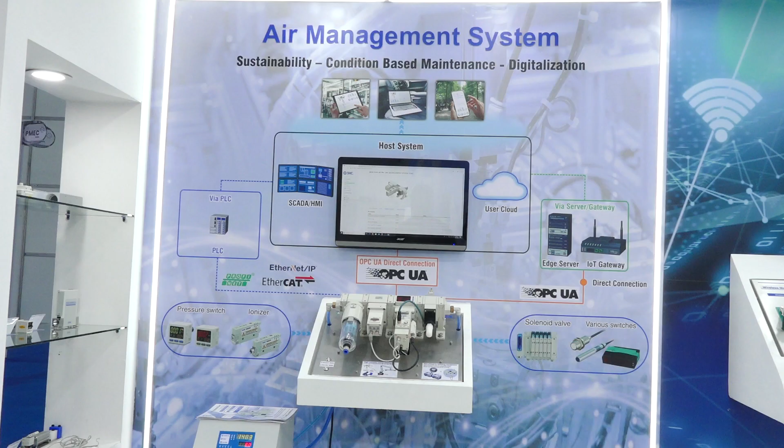So here we will be explaining the SMC air management system.

If you see in this panel, starting from the left side, first we have the mist separator. Whatever impurities are coming in the air, this ensures they do not reach the further components, which helps us maintain the life of those components.

Next, we come to the electro-pneumatic regulator. The function of this regulator is to maintain the pressure in the machine.

Next is the flow sensor. This sensor provides options for flow, pressure, air temperature, as well as accumulated flow.

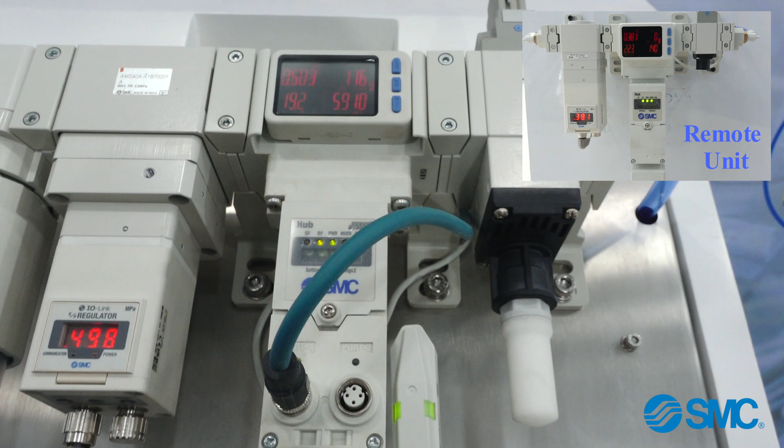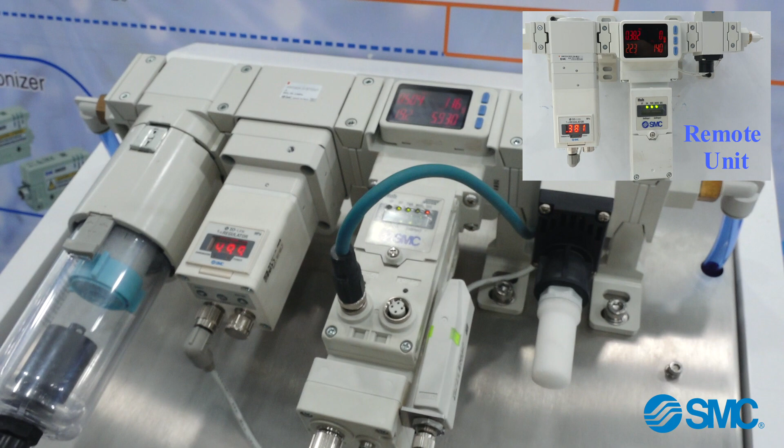Then below is our hub unit, which is utilized to provide us data and can communicate with further devices to capture their data. So our air management system communicates wirelessly to this remote unit and gets all that data through wireless communication, providing me data through that single unit. One AMS base unit can communicate with 10 more remote units. So this is the wireless remote which can communicate with the AMS air management system.

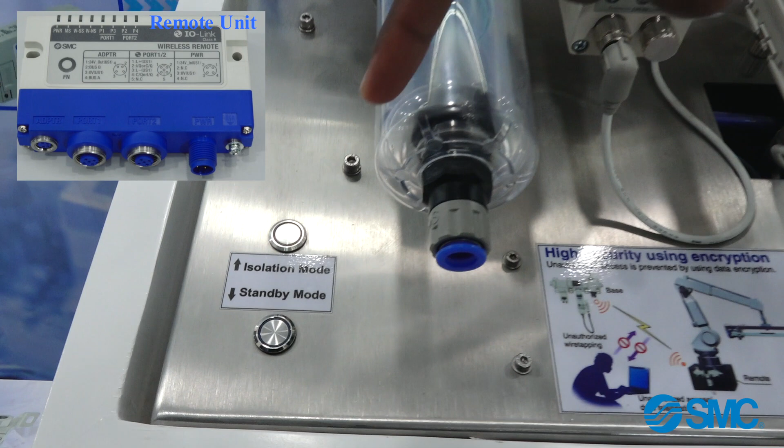It has two ports, port 1 and port 2. You can connect any IO-Link sensor with this, and you have to provide power to this remote unit, which will be connected to a wireless antenna. Through that you can get the data in your air management system through wireless communication up to 100 meters of working radius.

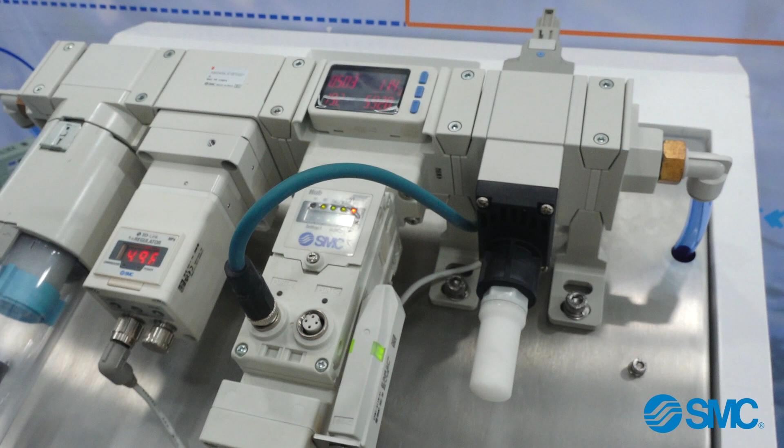Next, we come to the soft start valve. This soft start valve has a function where whenever your machine's first cycle starts, it makes that cycle run at a lower pressure, so whoever is working on the machine will not get hit by the full pressure.

Also, this valve is utilized for the isolation purpose. Whenever your machine is not consuming any compressed air and you want to isolate the air from the system, the machine will go to the isolation stage.

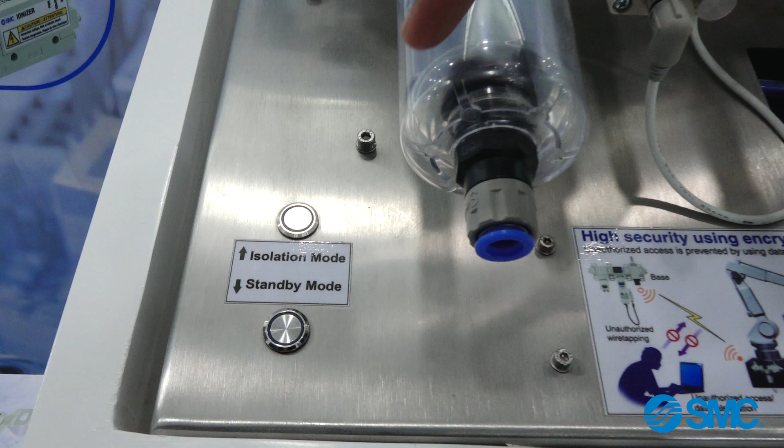Also, when you see here in the panel, there are two buttons: one is the isolation button and the next is the standby button. Once I press the standby button, the device is programmed so that whenever your machine's air consumption is less than 120 liters, the machine will go to standby mode.

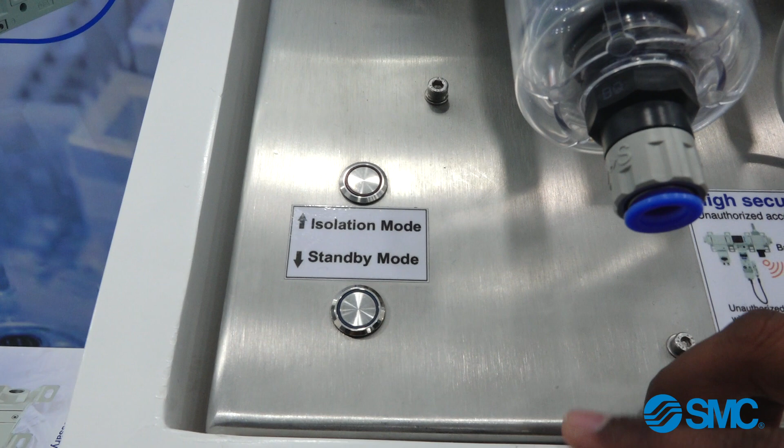So if we see in the system, the present consumption of the machine is 118 liters or 116 liters. Whenever my machine gets confirmation data from the PLC or through any external input signal, it will change the system from working condition to standby condition.

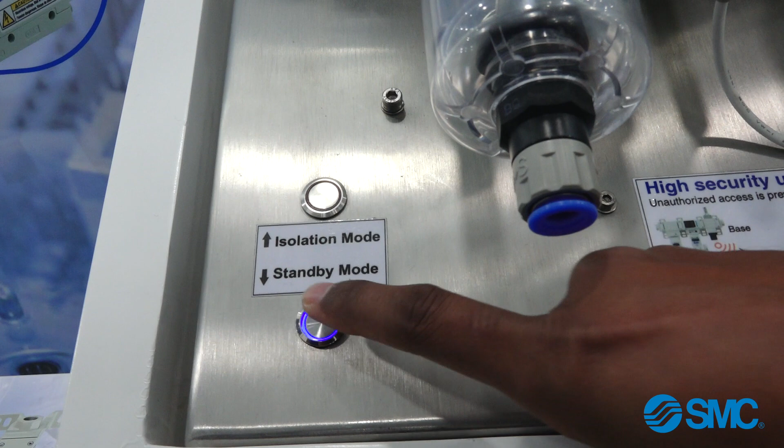So now I am providing the signal to the component through standby mode. Once I press the standby switch signal, my machine's standby pressure changes from 5 bar to 4 bar. So during the standby condition, my machine's pressure requirement is reduced, which has reduced my machine's air consumption from 118 liters to 88-90 liters, saving air during the standby condition.

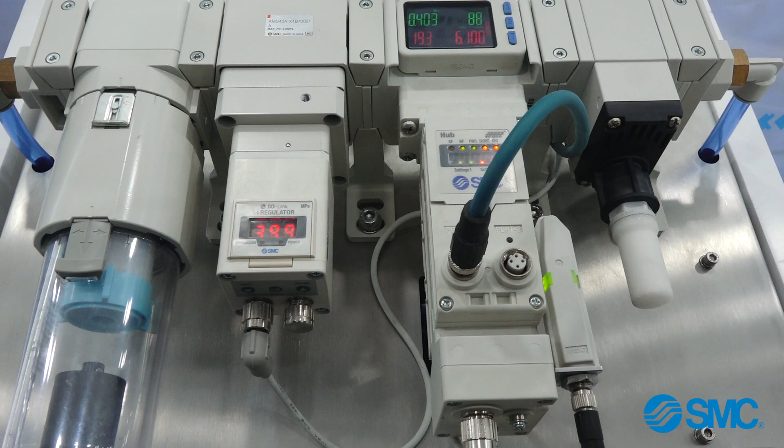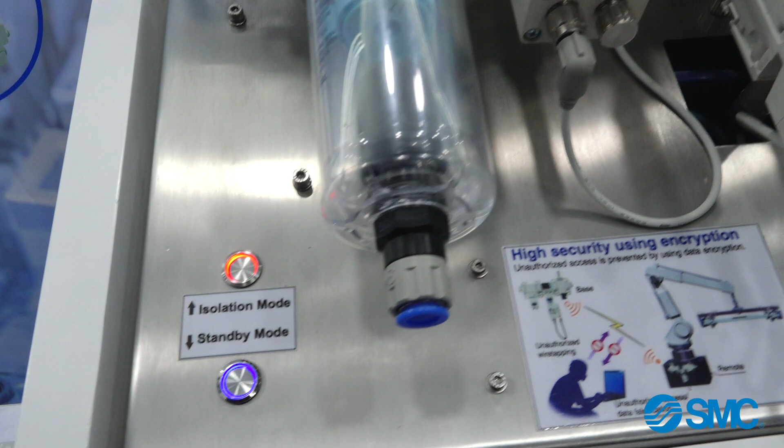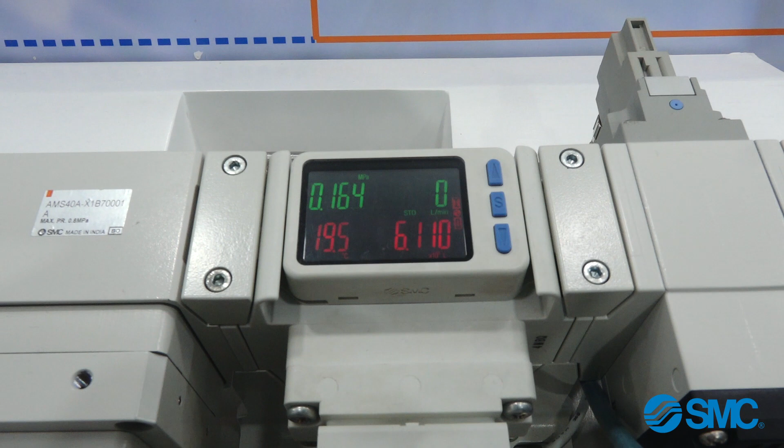Next function: when your machine is not working for a particular interval of time, you can provide the next signal. For example, you have given the machine an isolation signal. Once the isolation signal reaches, your machine consumption will drop down from 88 liters to 0 liters. So this is how your machine can smartly save your air consumption during non-working or standby conditions.

So now we will explain the web server function of the air management system. When I click the web server IP address which has been set in the device, it takes me to the home page. From the home page, I can see that two components are connected.

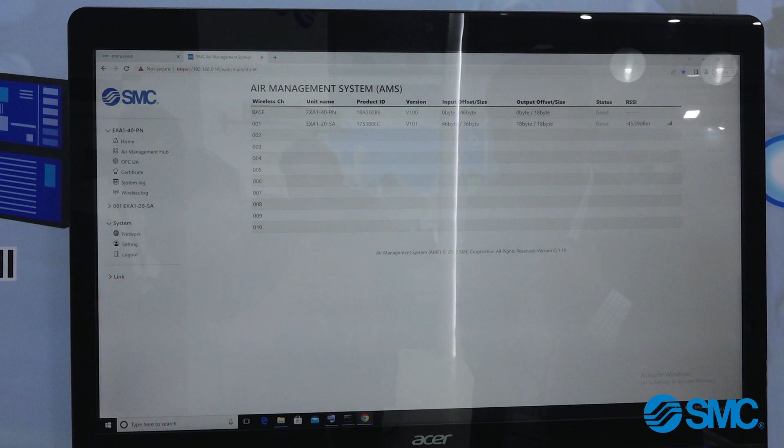One is the base unit and one is the remote unit. The remote unit communicates with the base unit through wireless communication. With this device, the wireless communication option is available, working up to 100 meter radius, operating at 2.4 gigahertz frequency. This provides a combination where you can scale your components to different locations without using any wire, which helps with CO2 reduction.

When we see here in device number 1, the master unit, air management hub, it will give me a pictorial view of what components are connected in this device. Same as we have seen in the panel, there is an electro-pneumatic regulator, there is a sensor. Whenever I click that part, the same window is displayed in the lower window.

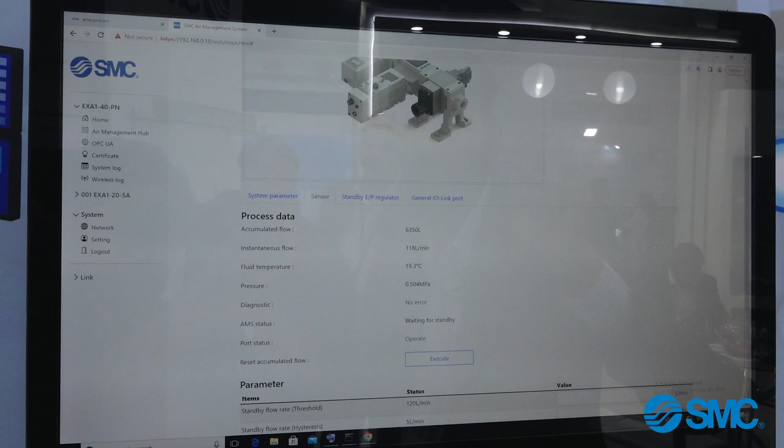So I am getting the live data of accumulated flow, my instantaneous flow consumption, my air temperature and the pressure of the machine. Presently the machine is waiting for the standby signal because my air consumption is less than 120 liters, which has been set here. I can change this data from machine to machine.

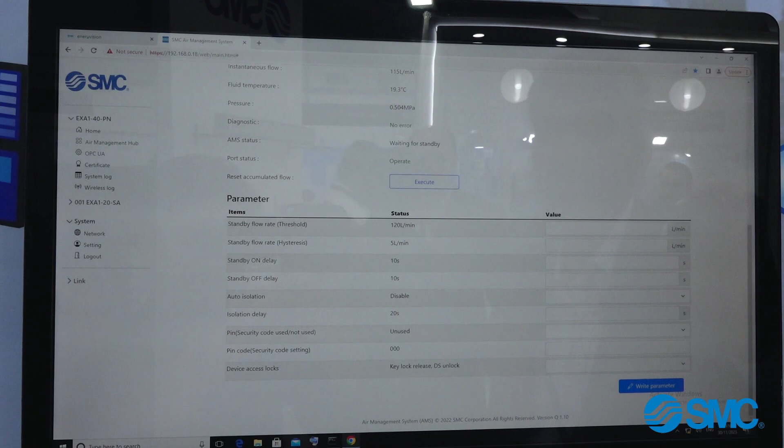Here the hysteresis has been defined at 5 liters per minute. Hysteresis will maintain whenever your flow does not sustain for a particular interval of time. I can also create a standby on delay. Standby on delay helps so that whenever my machine reaches a particular flow for a short period of time, it will not change its state.

Also I have an option for auto isolation. With the auto isolation feature, if I enable it, whenever the machine is in the standby condition for my particular set value, here we have set 20 seconds, the machine will go to isolation condition automatically through the standby signal.

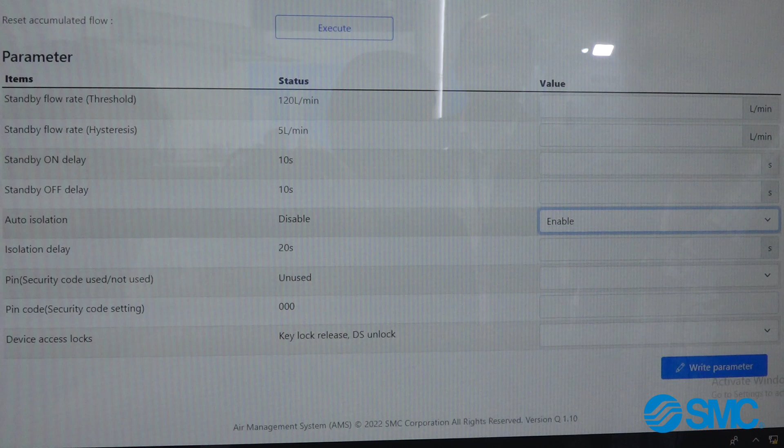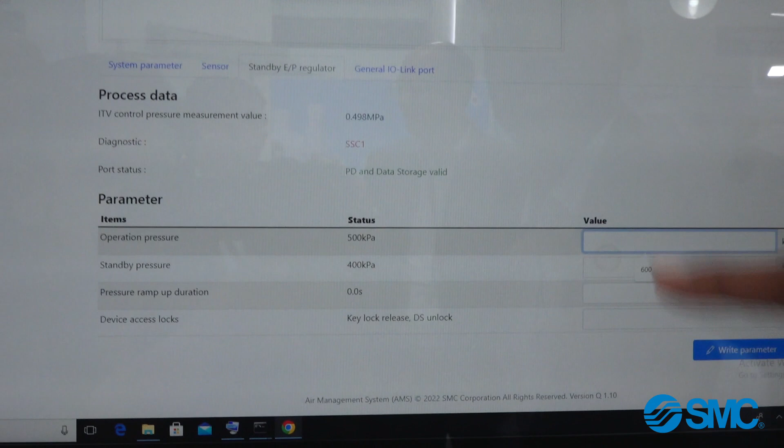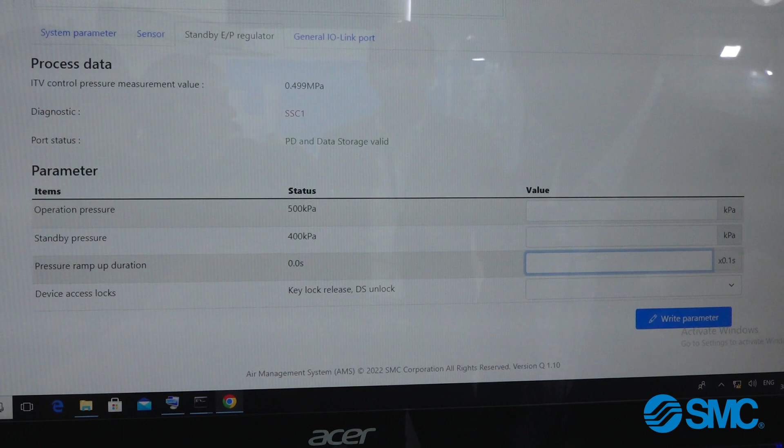The next function I get with this device is that I can remotely change my machine operating pressure and my machine standby pressure. The operating pressure presently set at the machine is 5 bar and the standby pressure set is 4 bar. I also have the feature to add the pressure ramp up duration. So I can ramp up in cycles of 0.1 second.

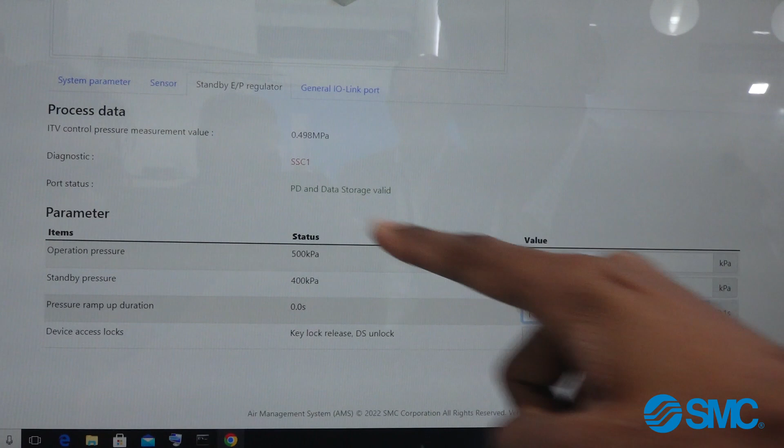Also with this I have a system parameter window. In the system parameter window, I can forcefully change the machine condition. If I change the condition to isolate, my machine immediately goes to the isolation condition. So the person who has access to this web logging function can access all the components which are connected in the air management system.

This device also has one extra option to connect an IO-Link port. With this IO-Link port, you can connect any type of IO-Link sensors which can be programmed and utilized to get the data using our air management system.

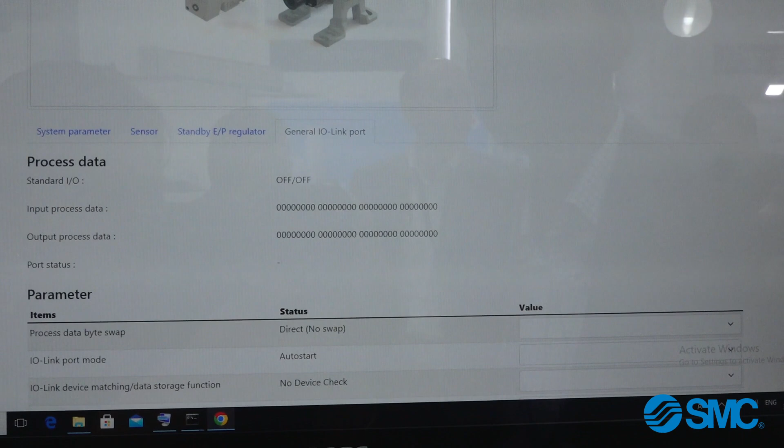With our air management system, we get an option for different types of communication protocol, for example EtherNet/IP, Profinet or EtherCAT. We also have an option of OPC UA, so through OPC UA you can also take the data. Presently we have utilized the Profinet option, so through Profinet we are getting the data in our AMS software.

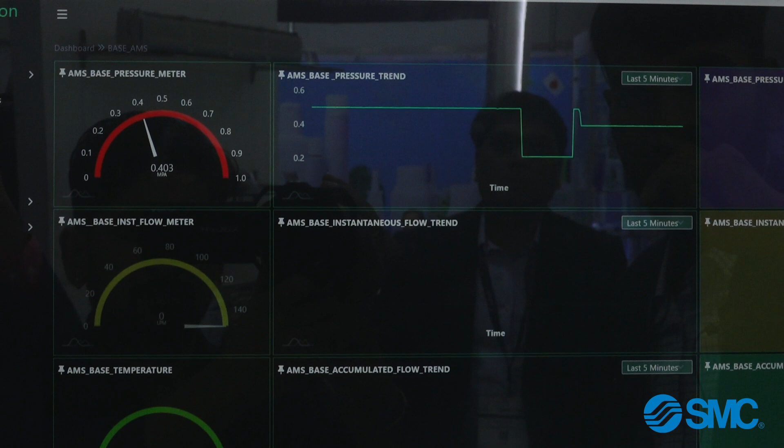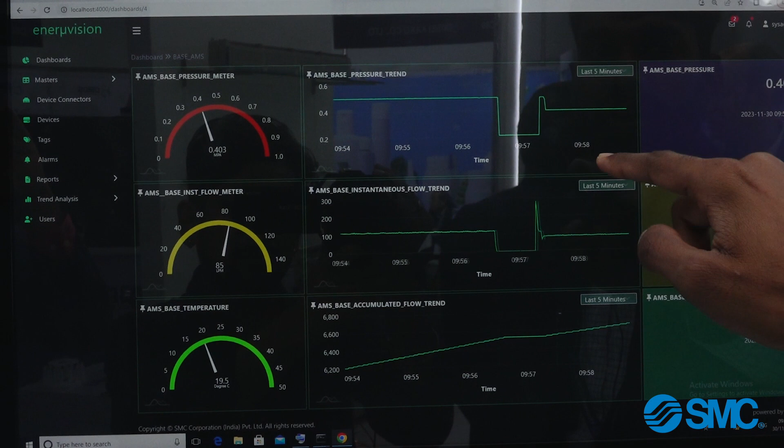Once I log in to the Energy Microvision software, I get the home window. In the home window, when I click the dashboard, I have created multiple tags. When I go to my AMS base unit, I can see how my machine is presently working. My machine working pressure is shown here as 4 bar, and I can see the continuous consumption of my machine in this window. The last 5 minutes graph is represented here.

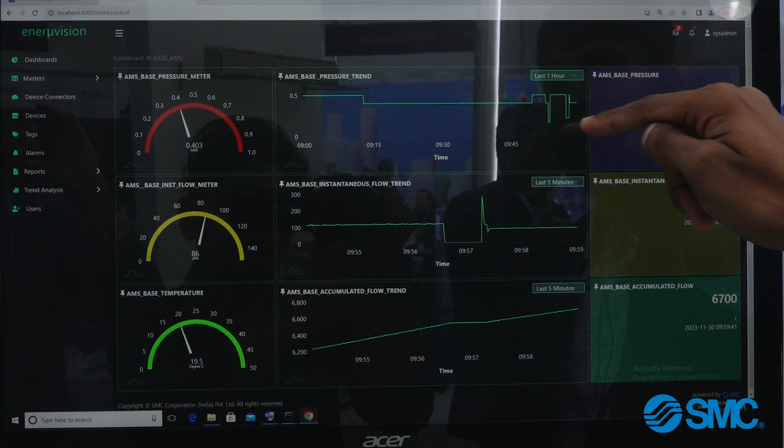We can see when my machine was in isolation condition, when it was in standby condition and when it was in working condition. Through this pressure trend, I can analyze how my machine working pressure behaves during its working conditions.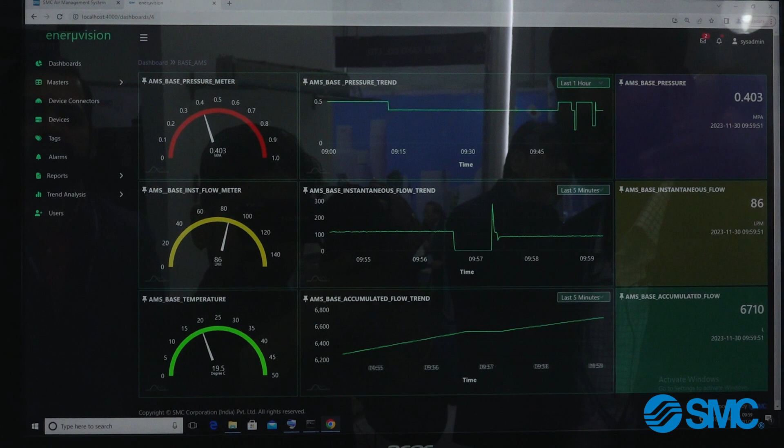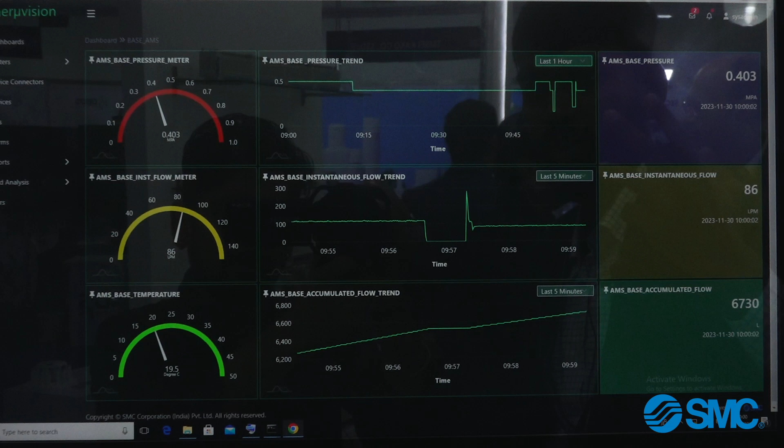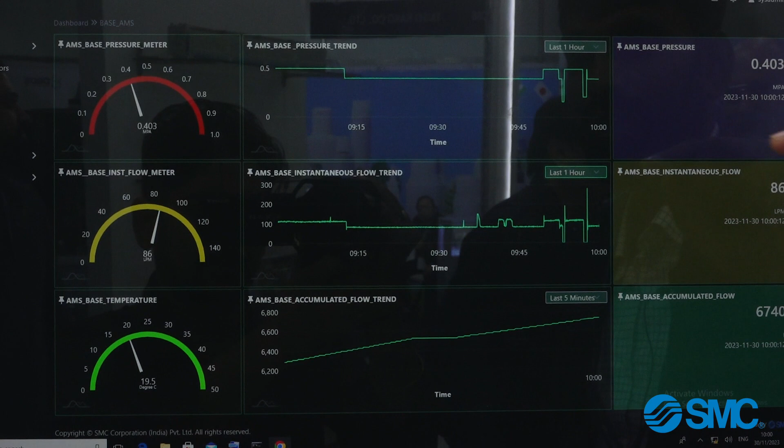In the next window, there is a flow trend shown on this screen. Presently my machine is consuming a flow of 86 liters, which is shown here. When I capture the data for the last 1 hour and see spikes in the machine, it means something happened in the machine which was not normal.

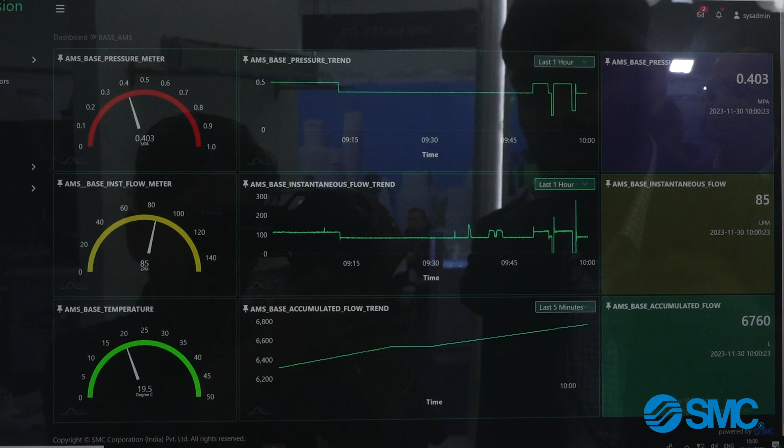During the normal condition, you are getting a linear graph. So it gives me my machine live data also. Whenever your machine air consumption increases, you know exactly at what time stamp your machine has come to a problem or your machine has some maintenance concern.

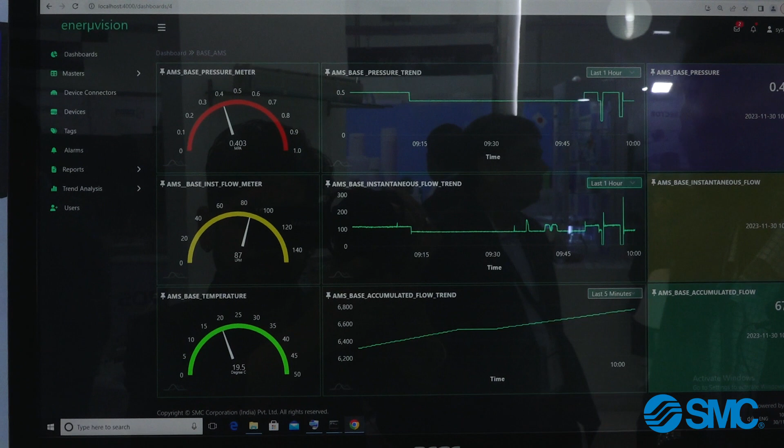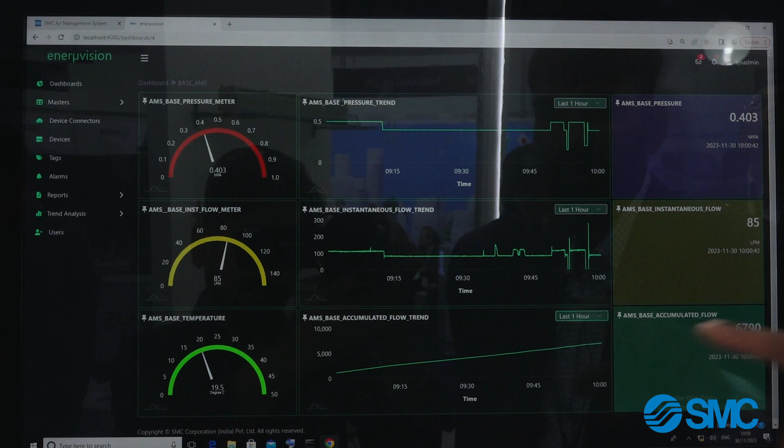Next is the trend of my accumulated flow. So from the last 1 hour, how my accumulated flow trend has increased. So I can compare my accumulated flow shift wise. For example, how much flow my shift 1 has consumed compared to my shift 2, compared to the productivity of the machine.

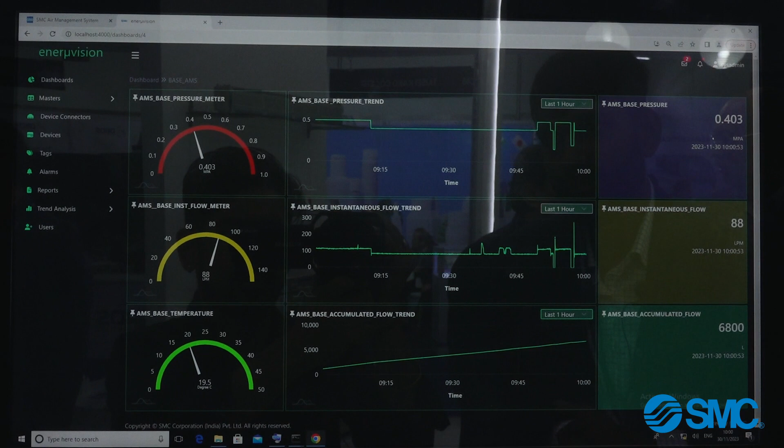Also, through AMS we are getting the air temperature. What is the air temperature of my system? So presently it is 19.5 degrees.

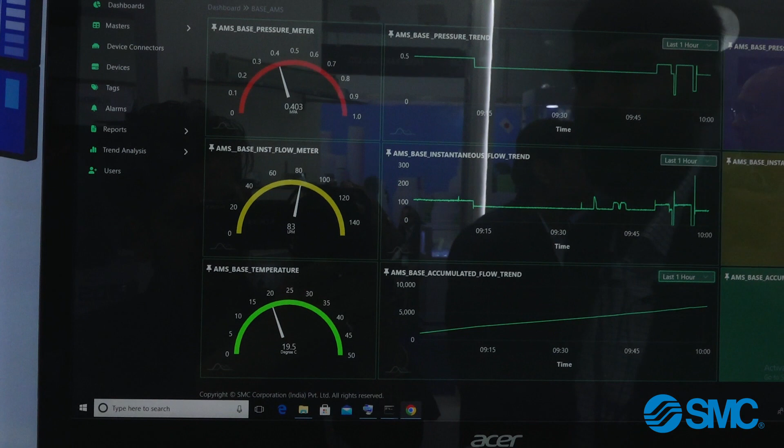Through this we have also used the energy trend analysis. So through this trend analysis, I can see how much energy has been saved using this air management system. So it has shown me that from this morning till now, in 1 hour it has saved me a total of 120 liters of air.

So through this graph I can get the complete data when my machine was in standby condition or isolation condition, and how much total energy saving happened for that particular shift or for that particular day. You can design your dashboard according to the requirements of your machine.

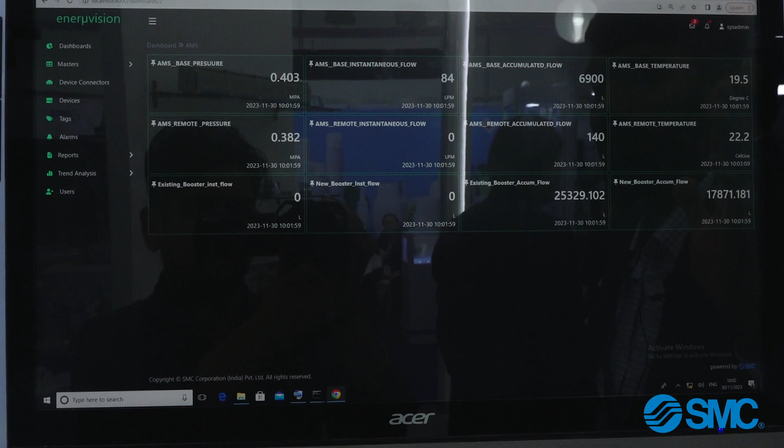So when we go to the demo unit, this is only the window of our demo kit which we have displayed there. So that display unit's flow and accumulated flow data has been shown here. And when I go to the complete AMS, I am getting the complete screen for my plant. Whatever sensors are connected with my air management system, all that data I am getting in my window.

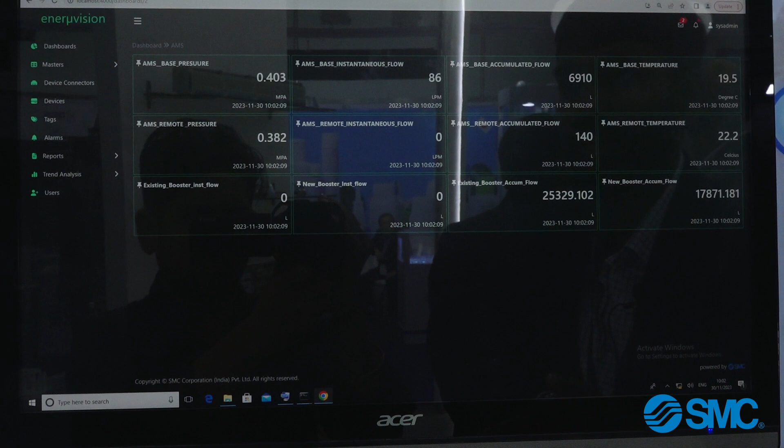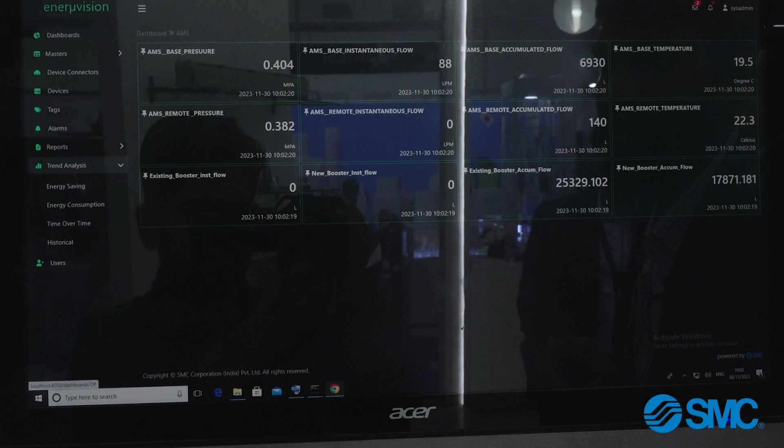I can generate reports. I can analyze the trends using the trend analysis features. So multiple options are given to you, because energy saving is only possible when you are monitoring the air consumption of your machine regularly and analyzing how your machine behaves.

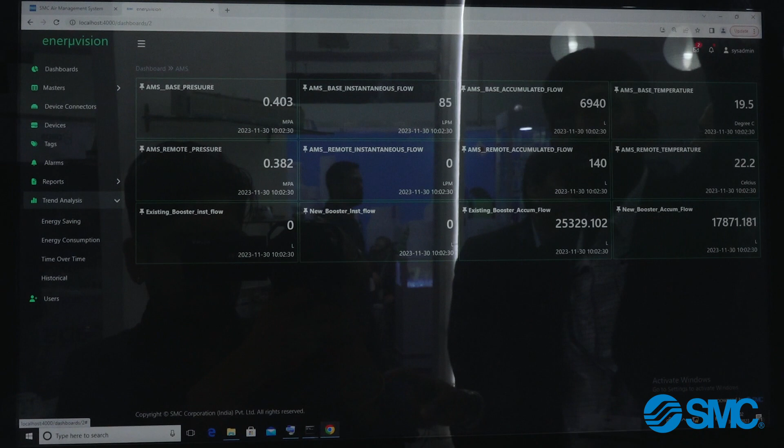Also, one more feature I want to highlight with this component, that is condition based maintenance. For example, when you installed your machine, its consumption was 1000 liters. After 6 months, the machine consumption increases from 1000 to 1100, and the user went to the machine and identified some issues. For example, the cylinder seal was damaged.

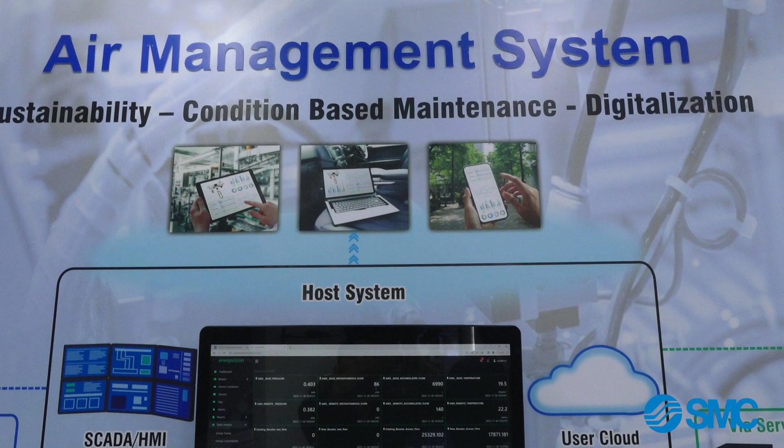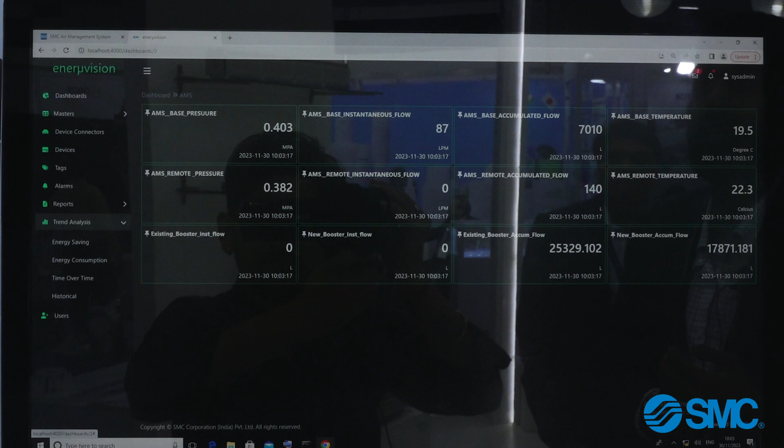So once he enters the data that at 1100 liters he found the machine's cylinder seal was leaking, and over a 1 year time frame we have a lot of data. So next time the same type of problem arises, the user will get an alert about what type of problem was there the last time the same flow reading was observed.

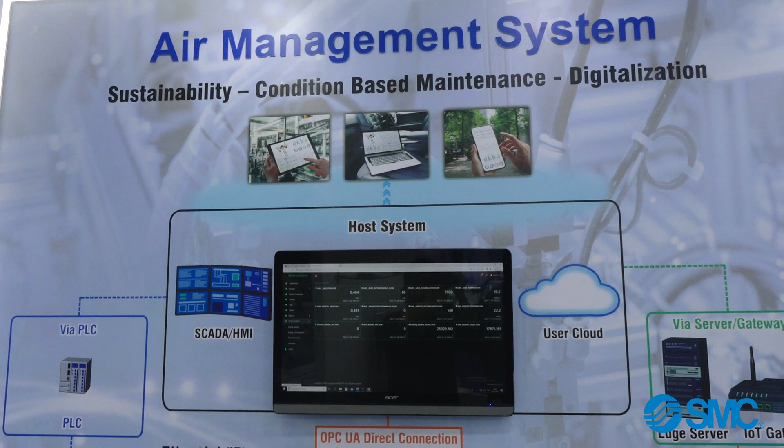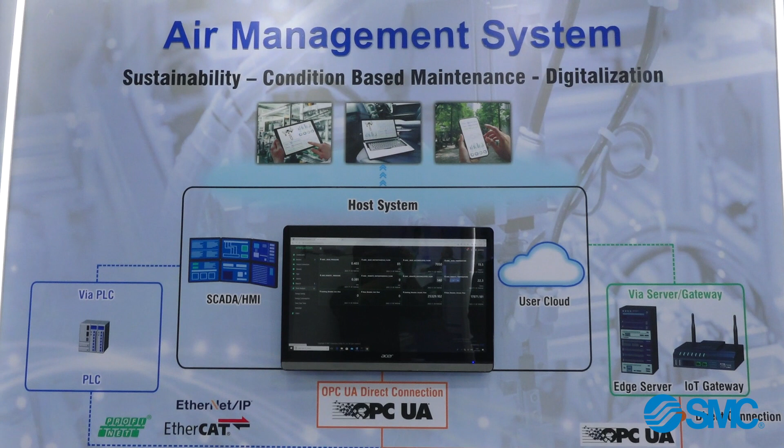So when we talk about this air management system, the focus of SMC is to create an ecosystem. Through this ecosystem you can connect all your plant sensor data. The sensors can be of any type, like a vibration sensor, flow sensor, water sensor, or your energy meter. All that data you can get through our air management system using our small remote units.

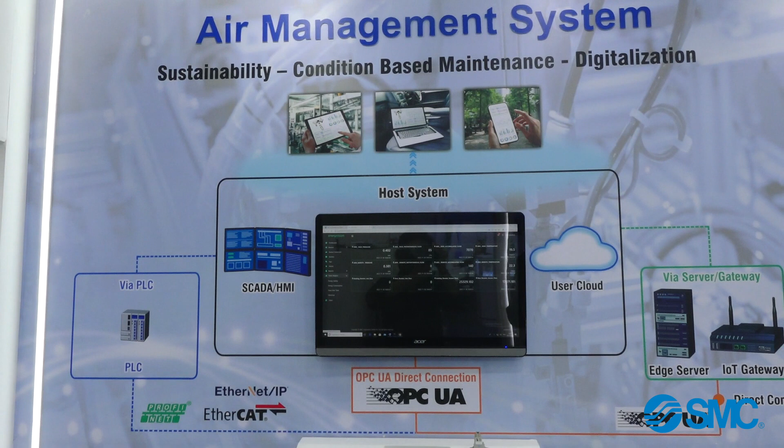If you have any type of sensors of any make, you can connect those sensors and get all that data through our air management system using the communication protocol, through OPC UA with a direct connection, or you can utilize the edge server. Through the edge server you can get the data in the cloud.

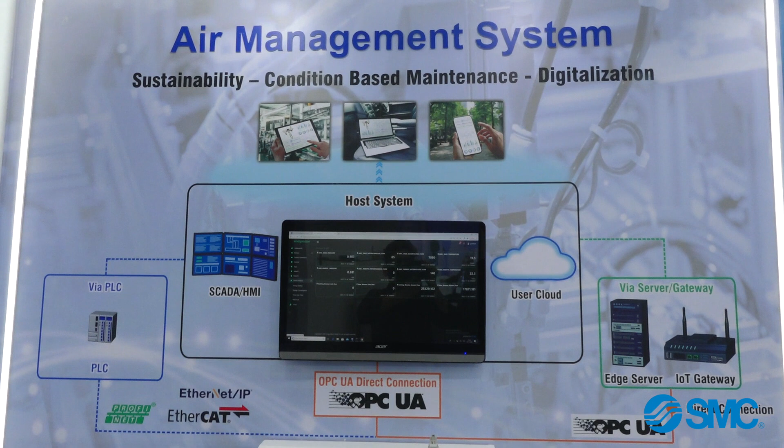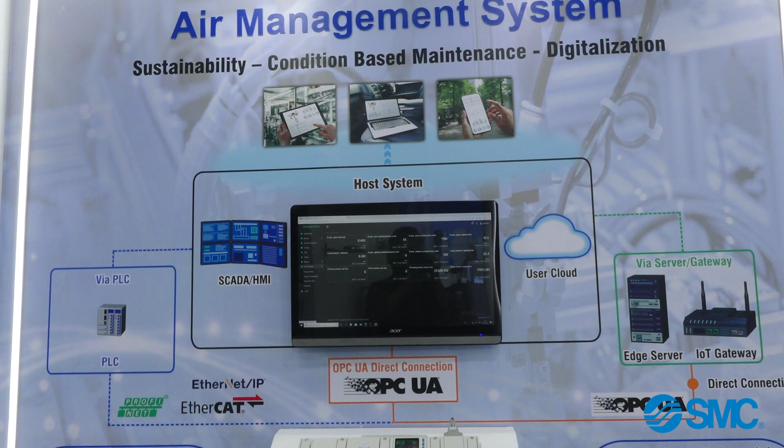So this is very interesting whenever you are talking about energy saving or CO2 reduction. That is only possible in your factory when you have analysis of your machines. And you can compare machine 1 with machine 2 when both machines have the same productivity: why is one machine consuming more air? And you can reduce the air consumption, which will help us reduce CO2 emissions.